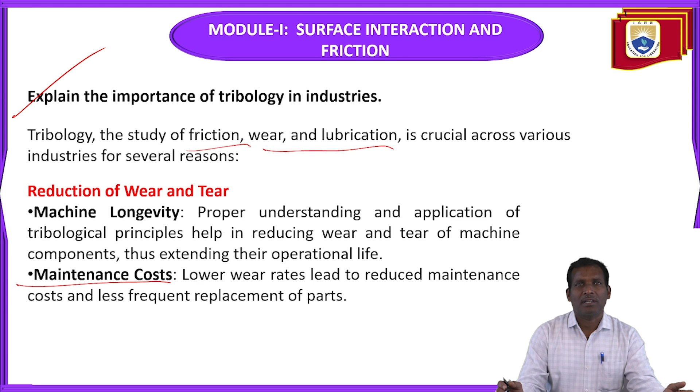Next, energy efficiency. By minimizing friction through effective lubrication and surface engineering, energy losses in machinery are significantly reduced. This enhances the overall energy efficiency of industrial processes. Operational reliability and performance consistency: tribology ensures that machines and components operate reliably and consistently, reducing the risk of unexpected failures. So by reducing the friction, you can improve the overall energy efficiency of the industrial process.

Operational reliability and performance consistency: tribology ensures that machines and components operate reliably and consistently, reducing the risk of unexpected failures. And safety: enhanced reliability directly contributes to safer working environments by minimizing the chances of accidents caused by mechanical failures. Sustainability: improved energy efficiency contributes to lower fuel consumption and reduced greenhouse gas emissions, aligning with sustainability goals. So you can improve sustainability, and maintain safety and performance consistency.

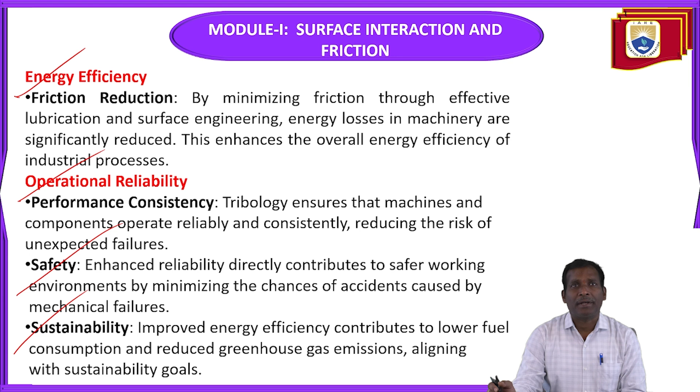And the cost saving point, economic benefits. Lower maintenance, repair, and downtime costs result in significant economic benefits for industries. Productivity: efficient and reliable machinery leads to increased productivity and higher throughput. Product quality: one is precision in manufacturing processes. Tribology plays a vital role in ensuring precision and quality of finished products by minimizing defects caused by friction and wear. Consistency: consistent machine performance ensures that products meet quality standards consistently, leading to higher customer satisfaction.

So here, economic benefits: lower maintenance and repair minimize the cost, which improves the economic benefits for industries. Similarly, the productivity will also improve, and the product quality will also improve.

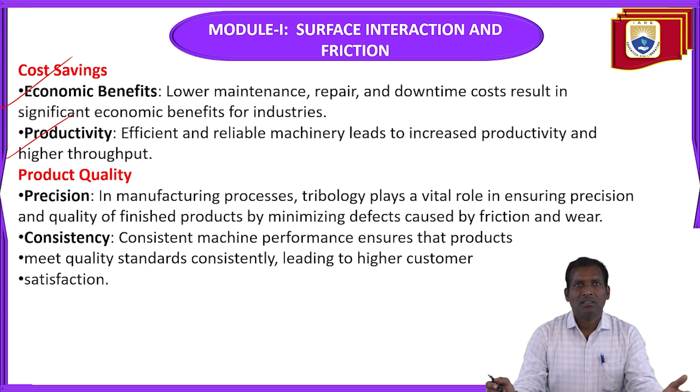Innovation and development. Material science: advances in tribology drive innovation in material science, leading to the development of new materials with better wear resistance and frictional properties. Technological advancements: tribological research leads to new technologies in lubrication and surface treatments, which can be applied across various sectors to improve performance and efficiency. It can improve the performance and efficiency of the machine.

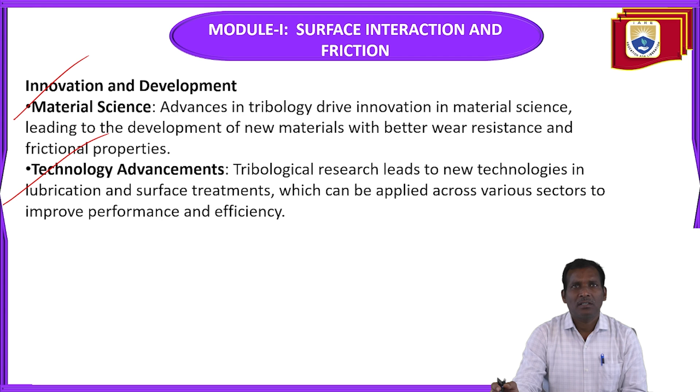Whereas in environmental impact: eco-friendly lubricants, the development of biodegradable and environmentally friendly lubricants, reduce the environmental impact of industrial operations. Resource conservation: by improving the durability of components, tribology helps in conserving raw materials and reducing waste.

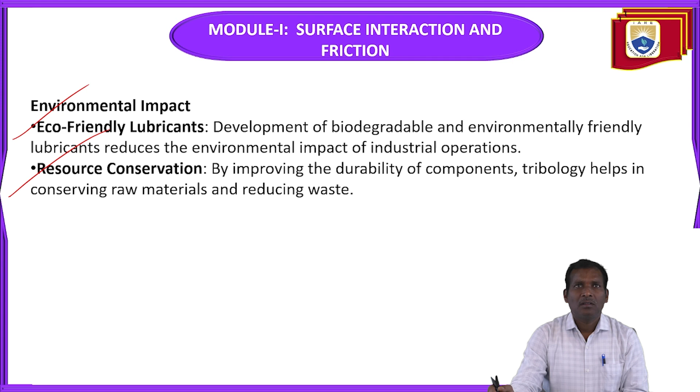Next, key industry applications. One is automotive. In the automotive sector, tribology is essential in designing and maintaining engines, transmissions and other moving parts to improve fuel efficiency and reduce emissions. Similarly, in the aerospace industry, high performance lubricants and advanced materials are critical for the reliability and safety of aircraft components. In manufacturing, tribological principles are applied to ensure the smooth operation of machinery, reduce downtime, and improve product quality.

So in industry applications, in the automotive sector, tribology is very essential in designing and maintaining engines. Similarly, in the manufacturing sector, tribology principles are applied to ensure the smooth operation of the machinery, reduce downtime, and improve product quality. So whenever you apply these friction, wear or lubrication treatments to the machinery in industries, it can improve the life and the product quality, and ensure smooth operation of machinery. In the energy sector, tribology helps in maintaining the efficiency and reliability of turbines, pumps, and other critical equipment.

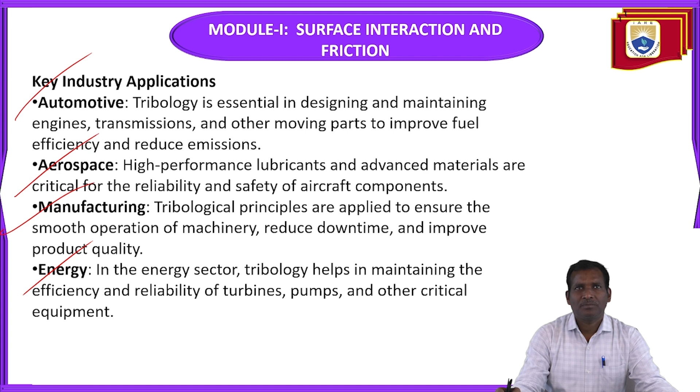So next question is: describe briefly surface topography and its applications. So what is this surface topography, and what are the applications of surface topography in tribology?

The surface topography refers to the detailed surface features of a material or object, including its texture, roughness, and pattern. It is characterized by the three-dimensional geometry of the surface, encompassing aspects like peaks, valleys, and the spatial distribution of these features. The surface topography is typically measured using various techniques such as profilometry, atomic force microscopy, and scanning electron microscope.

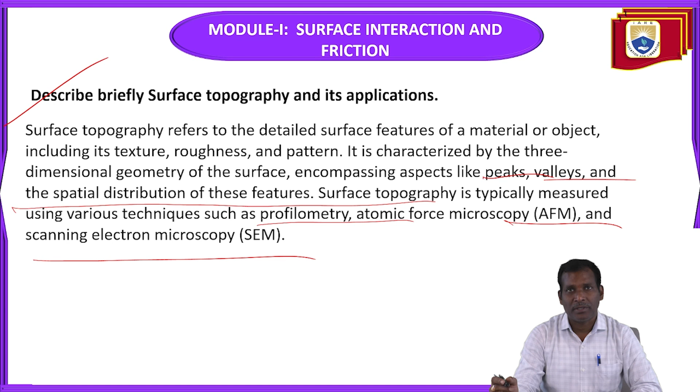So, the surface topography refers to the detailed surface features of the material. So, what are the features of that material or object? It gives full information, including its surface roughness values. So this topography is typically measured using various techniques such as profilometry, atomic force microscopy (AFM), and scanning electron microscopy (SEM) measurement techniques. So, applications of surface topography.

One is manufacturing and quality control. The surface roughness: assessing the roughness of surfaces is crucial for ensuring the quality and the functionality of manufactured parts, especially in precision engineering sectors like aerospace, automotive, and medical devices. The machining process: monitoring surface topography helps in optimizing machining processes, grinding, milling, turning, to achieve desired surface finishes and improve tool life.

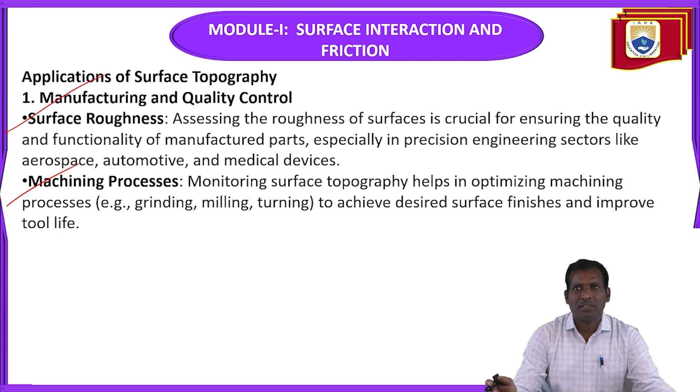So the applications in manufacturing sectors. So optimizing the entire machining process, whatever operations are required to complete the product. That may be grinding or milling or machining or turning, drilling, to achieve these desired surface finishes and to improve the tool life.

Next, tribology. The friction and wear: the interaction between surfaces in contact is heavily influenced by their topography. Understanding and controlling surface topography can help reduce friction and wear in mechanical systems, enhancing performance and longevity. The lubrication: the surface texture plays a significant role in the formation and maintenance of lubricating films. The proper surface topography ensures effective lubrication, reducing energy losses and wear.

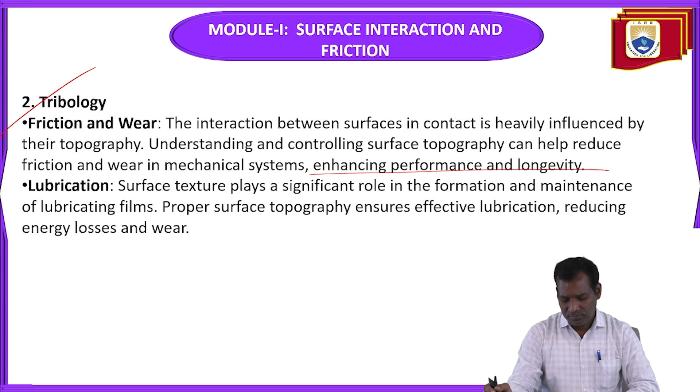Next, material science. Coatings and treatments, and fracture and fatigue, come under material science. The surface topography analysis is essential for evaluating the effectiveness of coatings and surface treatments. It helps in designing surfaces with specific properties such as enhanced hardness, corrosion resistance, or hydrophobicity. Fatigue and fracture: surface features can influence the initiation and propagation of cracks. Studying surface topography helps in understanding and mitigating fatigue and fracture in materials.

So, these coatings and treatments help in designing the surfaces with specific properties. So, what are the mechanical properties? Hardness, toughness, ductility, malleability, corrosion resistance, or hydrophobicity. So, to enhance these properties, you have to apply the coatings and other treatments. The fatigue and fracture, the fatigue property you already know. So, whenever the component is subjected to cyclic load, after a certain number of cycles, the component will fail at stresses below the yield strength.

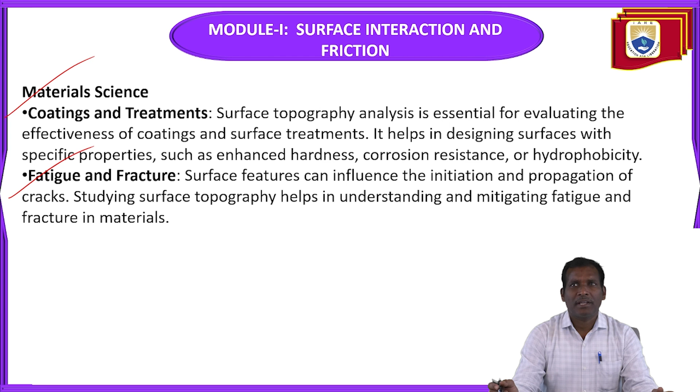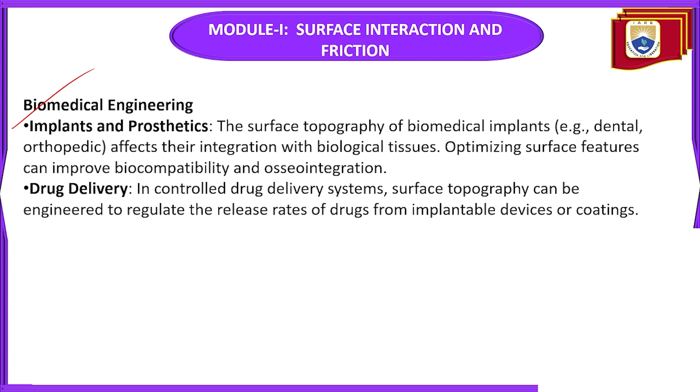Next, biomedical engineering: implants and prosthetics. The surface topography of biomedical implants, that is dental and orthopedic, affects their integration with the biological tissues. Optimizing surface features can improve biocompatibility and osseointegration. Then drug delivery, that is controlled drug delivery systems. Surface topography can be engineered to regulate the release rates of drugs from implantable devices or coatings.

In the case of biomedical engineering, control of the drug delivery systems. So, the study of surface topography leads to regulating the release rates of the drugs. Similarly, the implants and prosthetics. So, you can improve the biocompatibility.

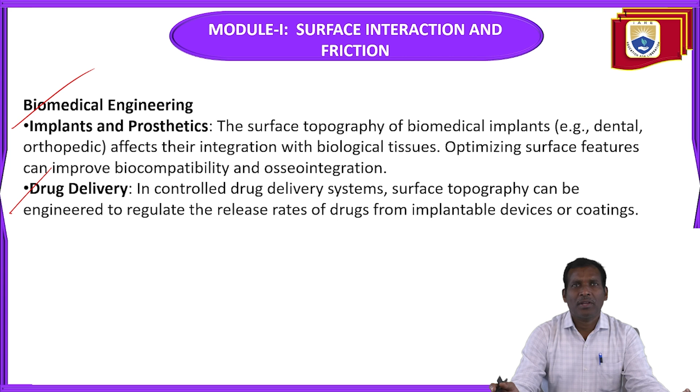Next, electronics and semiconductor industry. In the electronics and semiconductor industry, the importance of this topography: in microelectronics, the performance of microelectronic components depends on the precision of their surface features. The surface topography analysis ensures the quality and the reliability of these components. Solar cells: surface texturing of solar cells can enhance light absorption, thereby improving their efficiency.

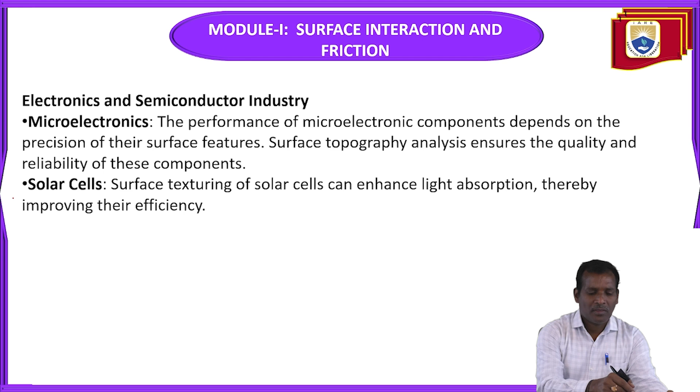In the optics case, the optical components: the surface finish of lenses, mirrors, and other optical components affects their performance. High precision surface topography measurement ensures optimal optical properties. Anti-reflective coatings: surface texturing can be used to develop anti-reflective coatings, improving the performance of optical devices.

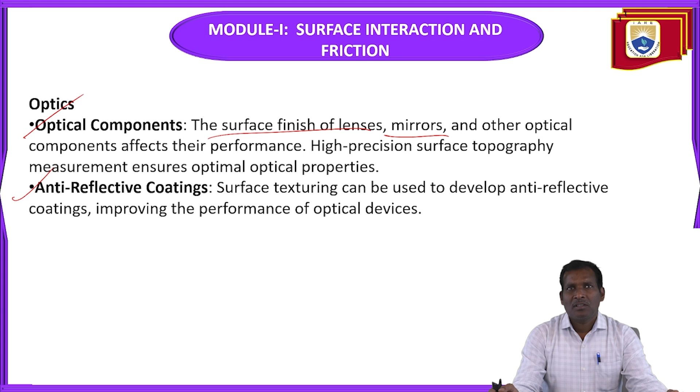So next, geology and earth sciences: terrain analysis, and erosion and weathering. So by studying the surface topography, you can monitor the geology and environmental conditions. The surface topography is used for studying the geological features of terrain, helping in applications like mining, land use planning, and environmental monitoring.

Erosion and weathering: analyzing the surface features of rocks and soils helps in understanding erosion and weathering processes. So the measurement techniques are profilometry. So this is one measurement technique. It measures surface roughness and structure by moving a stylus over the surface.

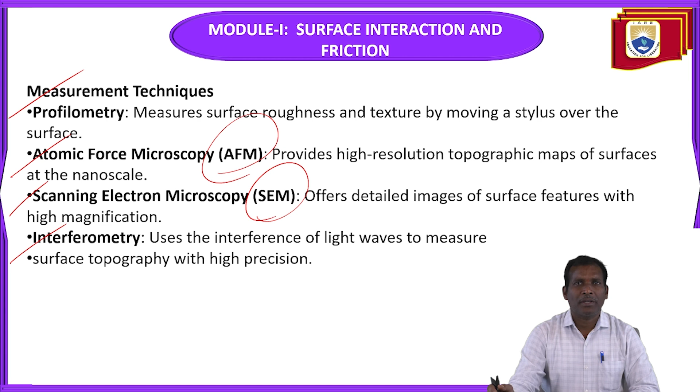Let's explain any two surface topography measurement techniques. Next question: this measurement technique relates to the previous slide, where we already saw different types of techniques - profilometry, atomic force microscopy (AFM), SEM, and interferometry.

Here, any two types of surface topography techniques you have to explain. One is profilometry. What is the principle? The major principle in this case is that it measures the surface profile by moving a stylus or probe across the surface of a sample, whatever surface you want to measure the topography properties of.

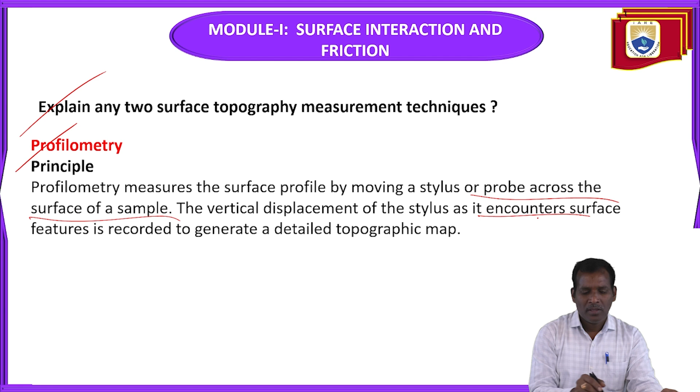The vertical displacement of the stylus as it encounters surface features is recorded to generate a detailed topographic map.

Next type: contact profilometry. Two types are there in profilometry. Contact profilometry uses a physical stylus that contacts the surface. As the stylus moves, vertical deflections caused by surface features are measured.

Non-contact profilometry uses optical methods such as laser or white light interferometry to measure the surface profile without physically touching it. This is the difference between contact and non-contact profilometry - the surface profile is measured without touching the physical surface.

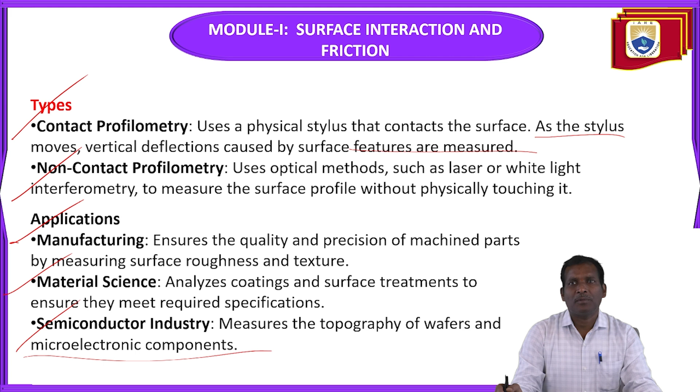The applications are manufacturing, material science, and semiconductor industry. In manufacturing, it ensures the quality and precision of machined parts by measuring surface roughness and texture. Material science analyzes coatings and surface treatments to ensure they meet required specifications. The semiconductor industry measures the topography of wafers and microelectronic components.

What are the advantages of this technique? Advantages and disadvantages: one is high precision, versatility, and detailed profiles. High precision means it provides accurate measurements of surface features. Versatility means it can be used for a wide range of materials and surface types. Detailed profiles means it generates detailed surface profiles useful for various analysis.

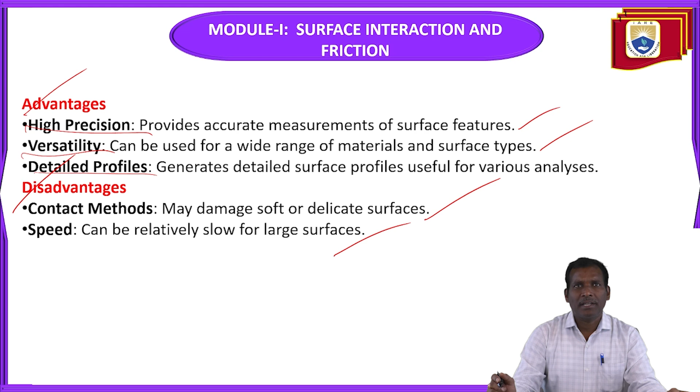Contact methods can damage soft or delicate surfaces. Speed can be relatively slow for large surfaces - these are the disadvantages. Contact methods damage delicate surfaces, and it's relatively slow for large surfaces, so you can only measure small surfaces. The advantages are high precision, versatility, and detailed profiles you can extract.

Next, the second method is atomic force microscopy, called AFM. The principle is that AFM measures surface topography by scanning a sharp probe, called a cantilever, over the surface. The probe interacts with the surface at an atomic level, and the deflections of the cantilever are measured to generate a topographic map.

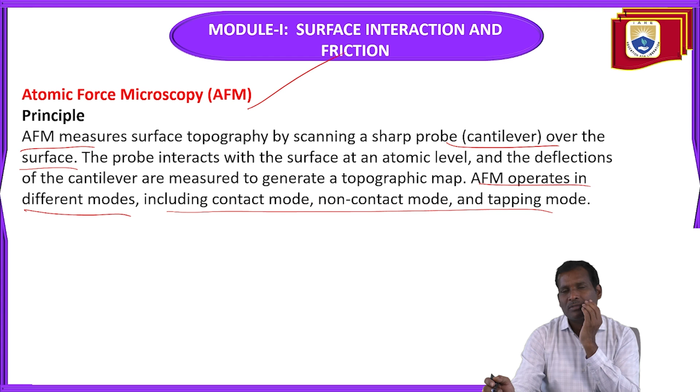The AFM operates in different modes, including contact mode, non-contact mode, and tapping mode. Mainly it measures the surface topography by scanning a sharp probe, the cantilever, over the surface in these different modes.

What are the modes? Contact mode, non-contact mode, and tapping mode. In contact mode, the probe makes direct contact with the surface, measuring deflections caused by surface features. In non-contact mode, the probe hovers just above the surface, detecting forces between the probe and surface atoms. In tapping mode, the probe intermittently touches the surface, reducing damage to soft materials.

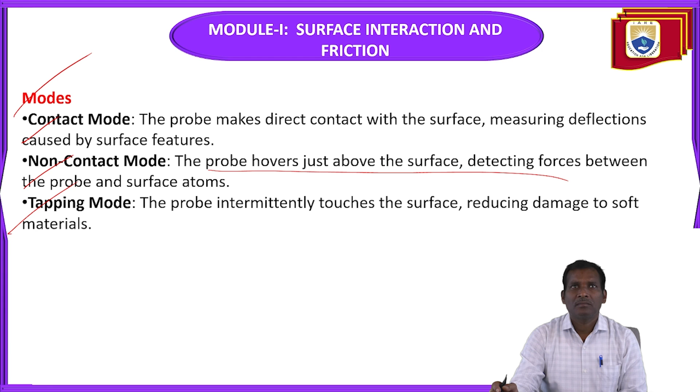The applications are nanotechnology, which measures surface features at the nanoscale, essential for nanomaterial characterization. Biological sciences analyzes the topography of biological samples, such as cells and biomolecules. Materials science studies surface properties and structures of advanced materials, including polymers and composites.

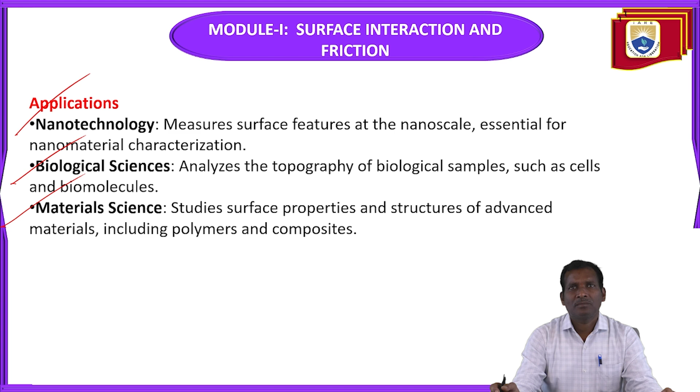These are the applications of these two techniques. The advantages are high resolution, versatility, and minimal sample preparation. High resolution means it provides atomic or near atomic resolution, enabling detailed surface characterization. It can measure a wide range of samples, including hard and soft materials, and requires little to no sample preparation.